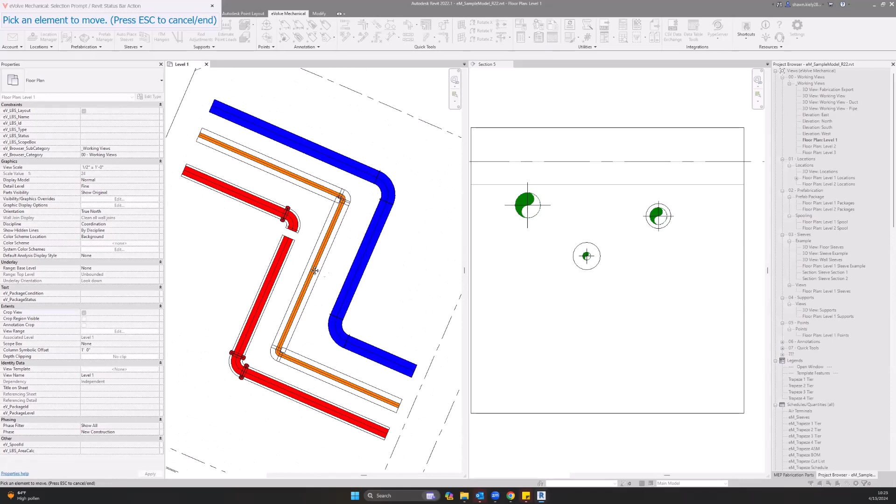This is going to be used for when you need to connect elements that are either disconnected by yourself or Revit disconnected them. So the first thing you'll do is select the tool, and then you're going to choose the element you want to move. In this case, I'm going to choose this straight and move it to this fitting. You'll see that it connected using the connections that you specify in your database.

Our other option is for reconnect elements. This will search for elements that are disconnected and try to reconnect them. So I will select that. I'll select all of these different fittings, hit finish. You'll see that it found two connections that were disconnected and reconnected them. So now this pipe is fully connected.

Our next one is going to be our spacing and alignment. This will allow us to align elements both horizontally as well as vertically. Our first option here is to apply our elevation alignment.

If we're going to apply it to a run, it'll be based off the first pipe you select. Edge will allow you to select an edge in the model. Offset will be an offset that you select from the level you're working on. And then reference plane will be a reference plane that you select in the model.

We also have the ability to align to the top or the bottom based on which side you want your trapeze to be running. Apply run spacing.

This will allow us to space the elements to a distance of our choice. So first thing we need to do is our gap. We're going to put this at 6 inches today. And then our rounding is going to be 0, which will not round it to anything. We'll leave it as it is. We do have the option for 1/8 inch, 1/4 inch, 1/2 inch, and 1 inch.

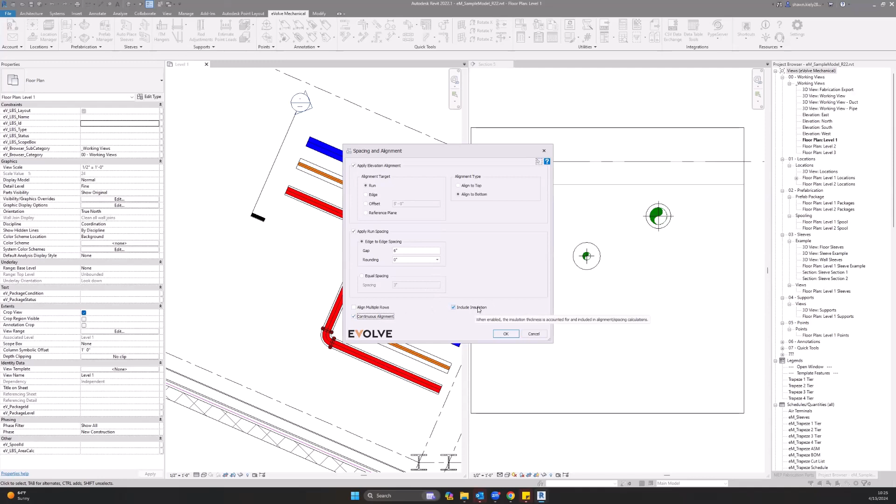Equal spacing will allow you to line things center to center, but most of the time you're going to be using edge to edge. Align multiple rows will allow you to align multiple rows if you have two pipes running on top of each other. Continuous alignment will keep the tool running until you tell it to stop. And then include insulation, as you see, will align to the insulation if you have it on your pipe.

So we're going to align these runs to this larger run here. So we're going to pick that first, and you'll see that now we pick the other ones. You can reselect the one that you've already picked without any issue. Hit finish, you'll see that it aligned them all.

The one without insulation aligned to the bottom of the pipe, and then the ones with insulation aligned to the bottom of insulation. And you keep running it here until you get to the end of the pipe or end of the run.

All right, so that is our alignment. So now all these pipes are aligned, even though there are different elevations, they are aligned and spaced.

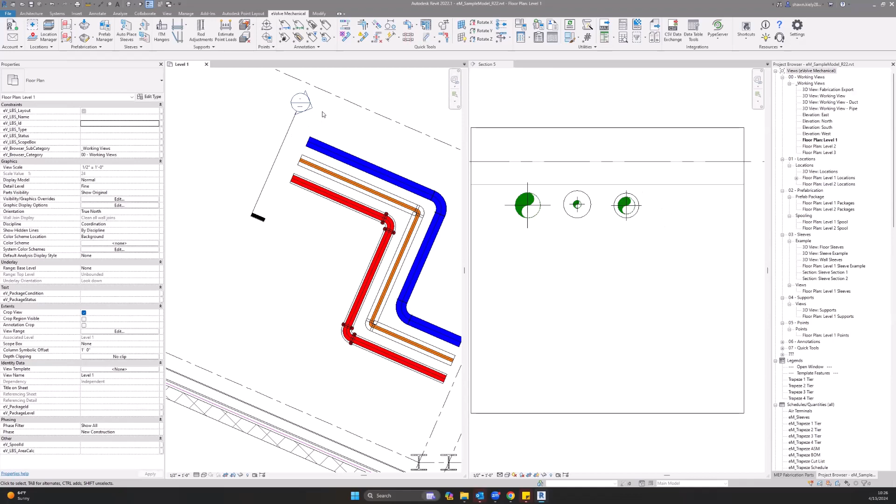The last tool I want to cover is our element swap. So in this case, I modeled the return and the hot water line wrong. So what we do is we select the tool, and it's as simple as just picking two, and it swaps their location exactly. So that is a couple of the quick tools.